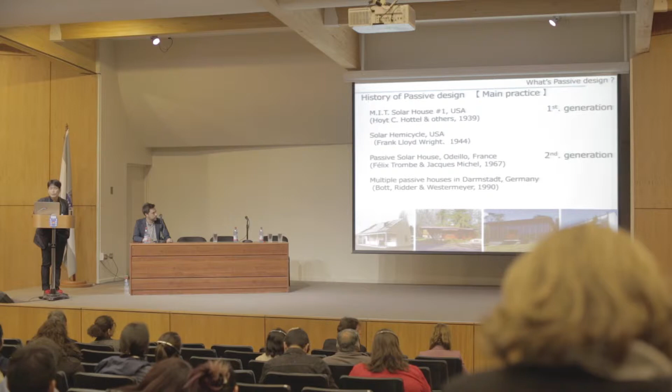This session's theme is heritage. Speaking of heritage, everyone will imagine a World Heritage site. These exist with the environment. I talk about architecture design and environment. What is passive design? First of all, the history of passive design. I think you all know that passive design originated from the solar house in the USA in the early 20th century. So many practices.

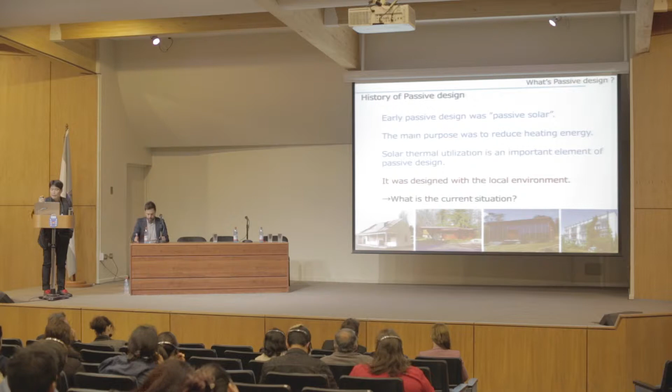These are important practices in the early 20th century. They were utilized for heating by getting solar heat passively, so it came to be called passive solar. Early passive design was passive solar. The main purpose was to reduce heating energy. Solar thermal utilization was an important element of passive design. Most people imagine passive is a negative word, especially in Japan. But on the other hand, it is design that accepts and forms from the environment.

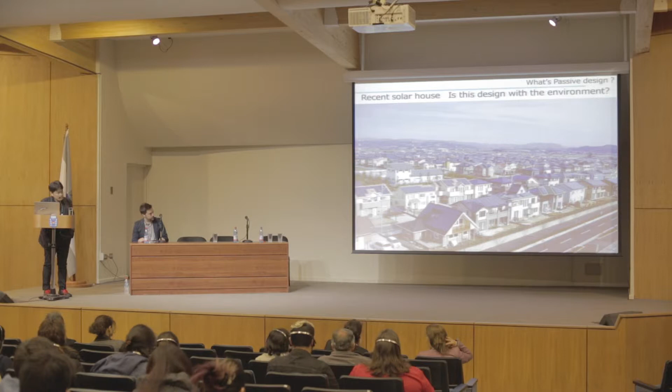What is the current situation? Recent solar houses in Japan, and recent houses. Could you call this a design with the environment? Actually, it is an energy-saving house. But I would like to say that a house or building is not a photovoltaic power plant. It is not only energy design. For the next generation, passive design should be designed not only with solar, but also with many environmental factors. Through my practice, I have considered passive design for the next generation.

Architecture exists in a relationship between human, building or architecture, and environment. Human: physical sense or behavior. Building: performance. Environment: responsive and low impact. And further, the environment such as climate, energy, resources, society. I think not only architecture, but also many environmental factors can become next generation heritage.

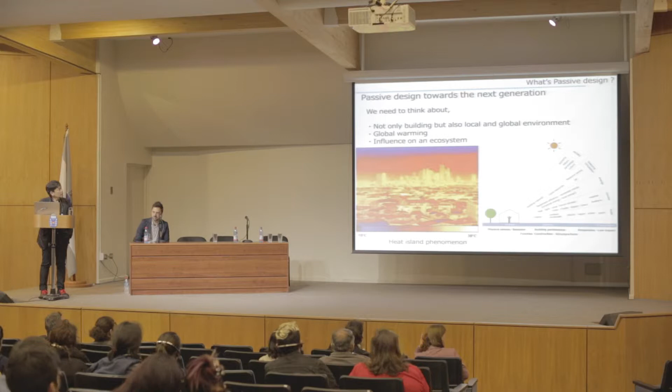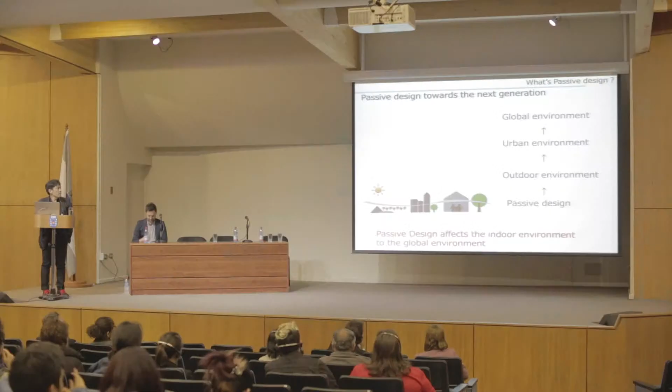In addition, there are hot summers and cold winters in Japan, so each performance is necessary. We need to think about the building and the local and global environment, global warming, and influence on ecosystems. Passive design affects the indoor environment through to the outdoor, urban, and global environment.

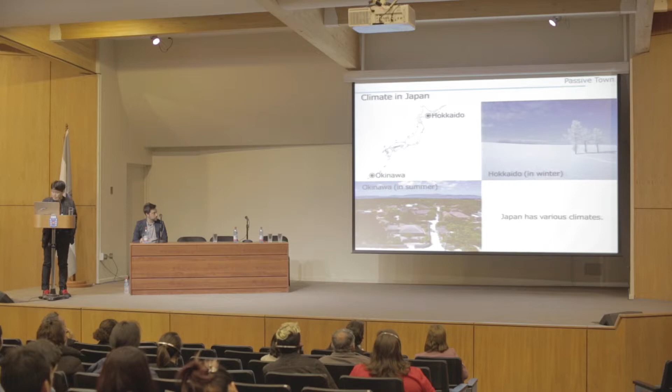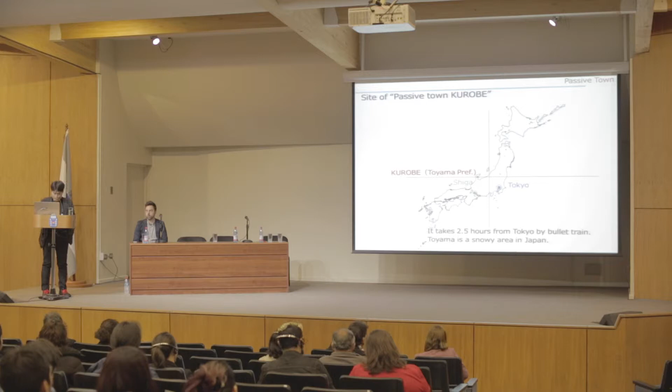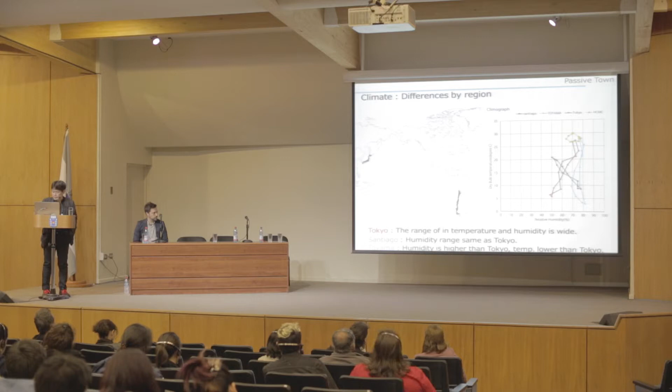This is a graph comparing climates. Horizontal axis is humidity, vertical axis is temperature. Each average value is put on the graph. Red line is Tokyo, green line is Santiago, blue line is this project, Toyama. Tokyo has a wide range of temperature and humidity. Santiago, I imagined it hotter, but it is cool. This project is very cold and high humidity, in Toyama.

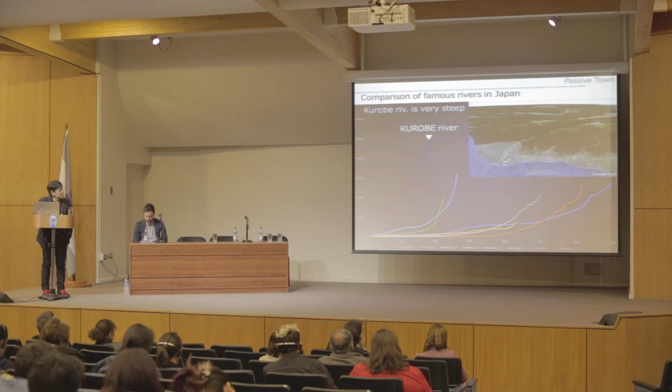One of the features of this site is that mountains and sea are very close. There is a mountain over 3,000 meters less than 50 kilometers away. During winter, this mountain has snow over 8 meters, and it's a very famous tourist place in spring. The Kurobe River flowing through this area is one of the very steep rivers in Japan. The topography gave a rich natural environment, especially water resources, and the landscape is beautiful. Santiago has very similar scenery.

I briefly introduce the design concept: passive design in the sustainable society of the 21st century. Realization of local energy town and houses. Utilize natural potential, reduce artificial energy, and utilize local natural energy. Environmental symbiosis, not only with nature but also community. Local environment: wind for ventilation, sun for heating in winter, water for cooling in summer. Much groundwater from snow melt from the mountain, the 8 meters of snow. Biomass for hot water, utilizing timber resources. We integrated those into the architecture design.

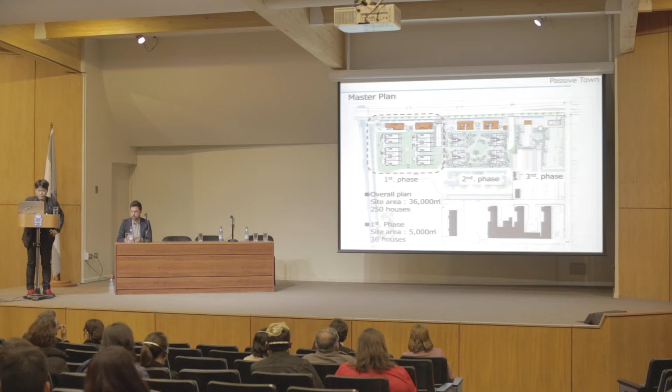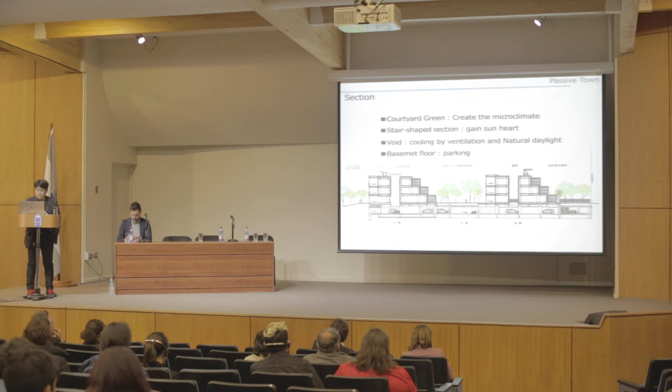This is the master plan. Over the next few years, it will be a town of 250 houses. Now three phases are completed, about 120 houses. This is the section: the courtyard creates a microclimate, the stair shape gains sun heat, and the void provides cooling by ventilation and natural daylight. The basement floor is parking. Equipment planning: solar heat for water, biomass for heating and hot water. Groundwater, about 13 degrees, is used for cooling.

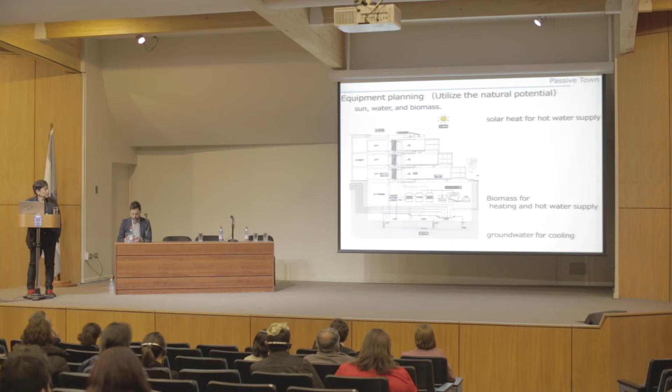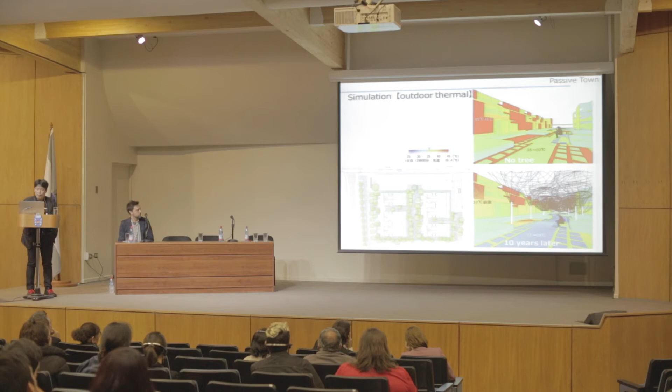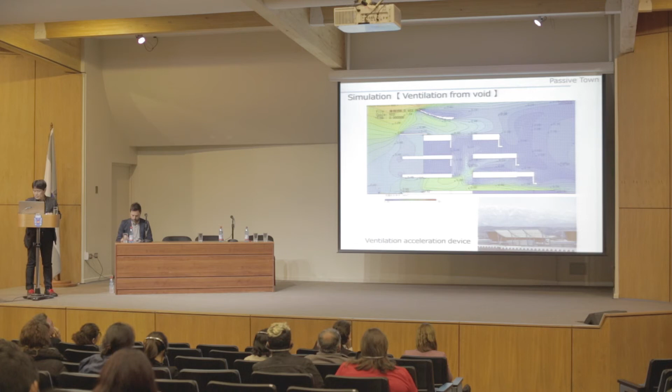In design, at each stage, we design with many simulations. This is also a necessary method for current passive design. This picture is the summer environment. This is a wind simulation of a wide area, and the ventilation from the void. We designed a ventilation acceleration device like a wing. According to simulation, we expected a reduction of 34%. Furthermore, we expected to reduce artificial energy by 60% by using biomass.

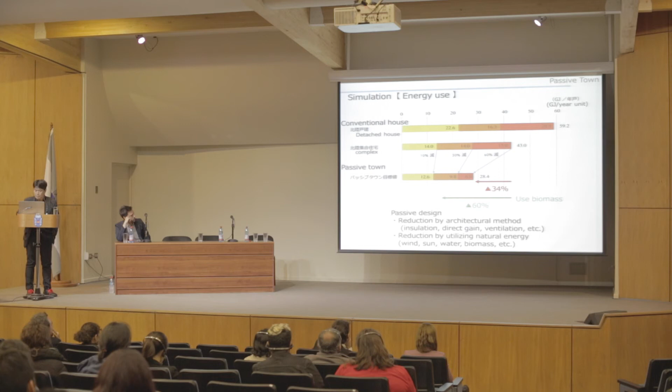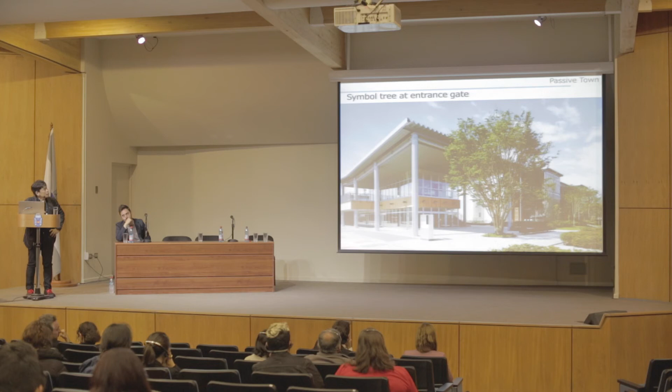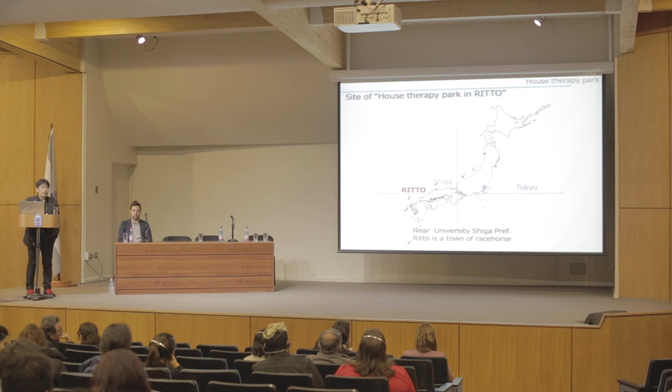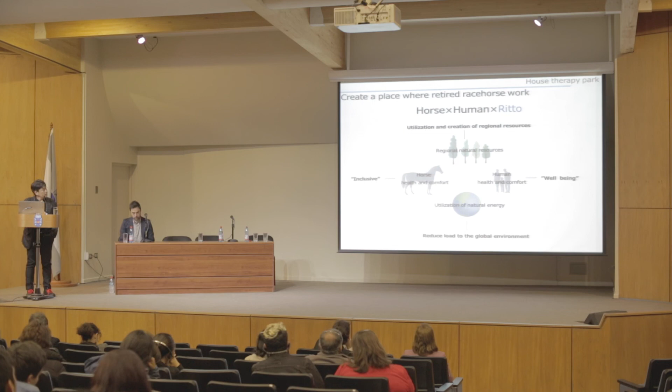Next, another project very briefly: a horse therapy park in Ritto. It's under construction now, to be completed in May this year, in Shiga Prefecture, about 1 hour by car from my university. Ritto is famous for its big racehorse training center. Racehorses have a short active period, and it's required to create a working place after retirement. In this project, we aim for coexistence of horse, human, and region: human well-being, horses, regional resources, and global environment. And the view of a beautiful mountain.

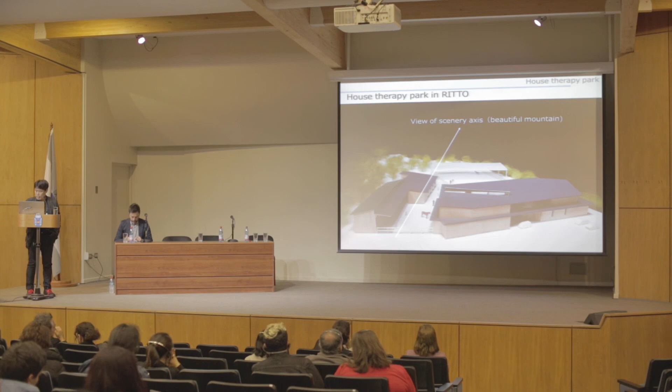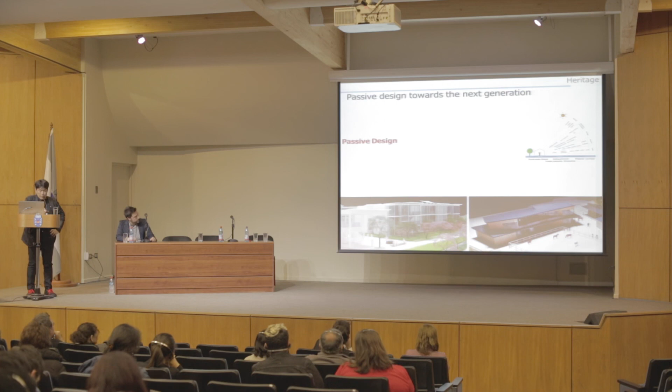The theme of the session is heritage. Passive design began with the use of solar heat. Next generation passive design utilizes the local environment, climate, energy, resources, and comfort, is responsive with nature, conserves energy for a sustainable society, and respects the local environment and community. I think that it will become next generation heritage.